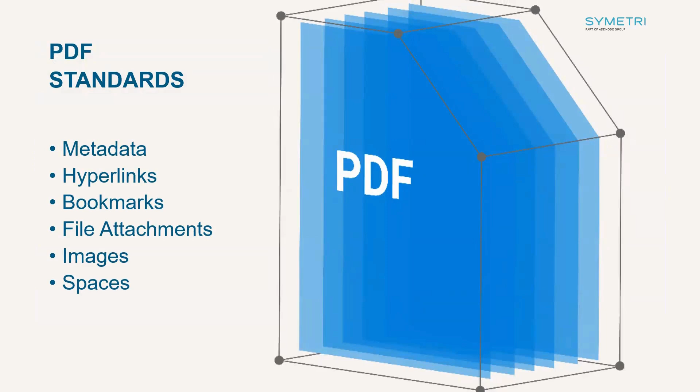Typically, when we talk about PDF files, we often include metadata, hyperlinks, bookmarks, file attachments, images, and spaces without realizing their effect on the PDF file. The benefit of using Bluebeam Revu as your PDF editor is that you can harness and control all of this data.

And I plan to show you some of those tools in today's live demo, including tools for navigating PDF files, tools for marking up PDFs and how to customize the tool chest, the use of profiles and customizing the user interface, the power of the markups list and ways to generate reports, Bluebeam's built-in automation for searching files, comparing documents, and generating interactive forms. And lastly, how to work collaboratively in the cloud with Studio.

So let's jump into our live demonstration.

All right, so I've pulled open Bluebeam and I have a couple files already.

First, we want to show the ease of navigating in a Bluebeam PDF. We can navigate along the bottom of our screen to different pages, and we can also change to a scrolling page mode where we're able to scroll through the document.

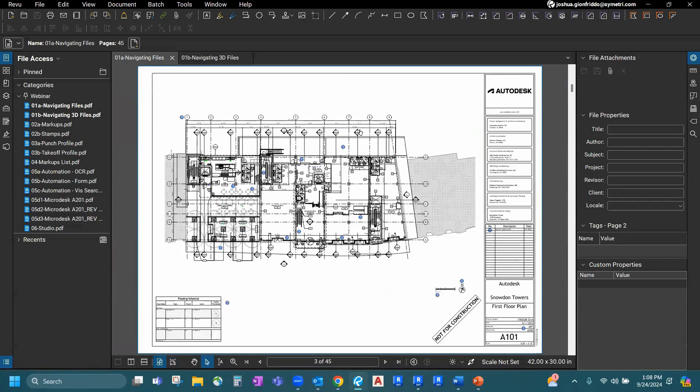One of the automations that shows up when you print from Revit is that your section heads will become hyperlinks. If we look at these section cuts, you'll see that the icon has changed, and if I click that, it'll take me to this page.

I can also use the little icons on the side of each level to take me to the floor plans. So navigating around your PDF file is quite easy. You'll notice on my thumbnails, the pages are currently numbered 1 through 45.

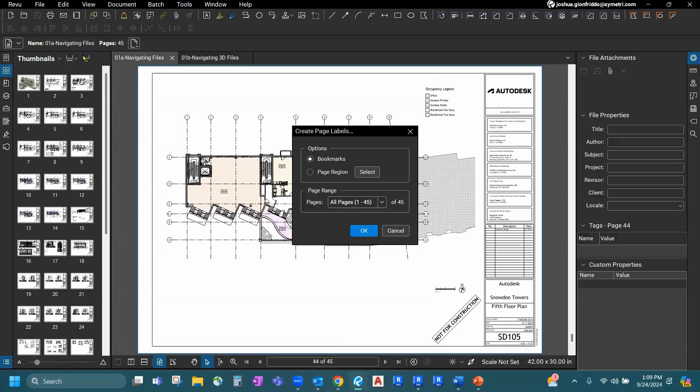If I'd like to have these pages numbered based on the sheet number, it's just a couple clicks to make that happen. We would come under here for page labels, choose a page region and select that region. Find the area of our sheet numbers and highlight that cell, and we can then tell it to perform this operation on all pages.

And if you look here on my thumbnails, all of these are now renumbered to their actual sheet number. If I want to navigate with that, I can do that as well, A502, and it'll take me to that page.

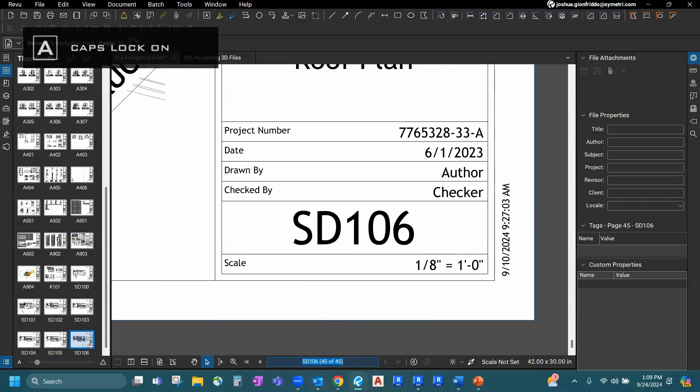This also works well when navigating in 3D files. So we have a 3D PDF file. These are able to be generated from Revit. Once you have Bluebeam installed, you'll have a Bluebeam plugin that will show up inside of Revit, and you can create 3D PDF files right from the software.

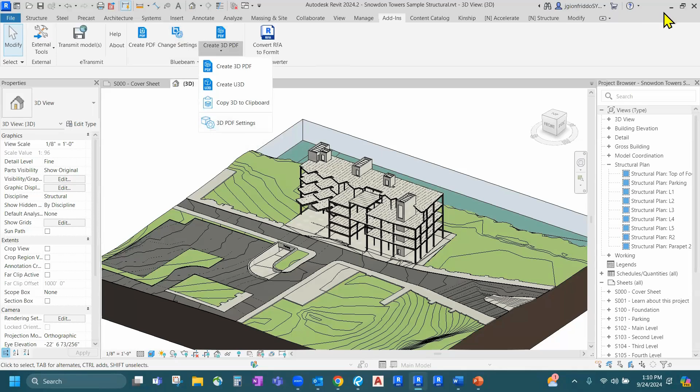Once created and you're inside of Bluebeam, you'll be able to navigate, orbit, as well as control the visibility graphics with different styles. And you can even section box and chop into the model if you'd like to. So we can section box the model.

And I mentioned metadata. If we click on any of the objects located in this 3D PDF, we will see all of the metadata associated with that object that came out of Revit. So all of that smart information is maintained, and we can sort by either the name of the parameter or by the value of the parameters.

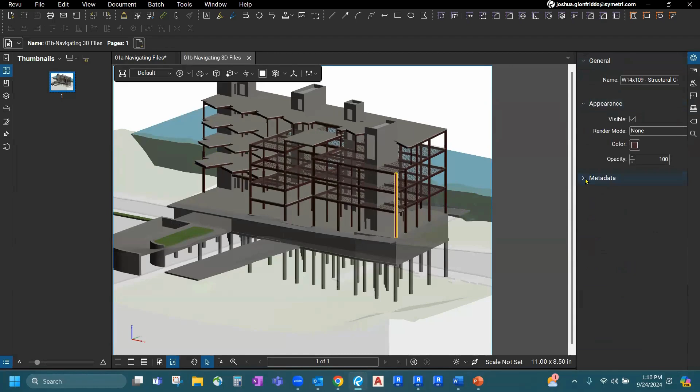So as you can see, navigating documents is a breeze with Bluebeam. Let's take a look at some of our markup tools.

Bluebeam has markup tools available either along the ribbon or in the tool chest, and you can work in either location. We can quickly add text boxes.

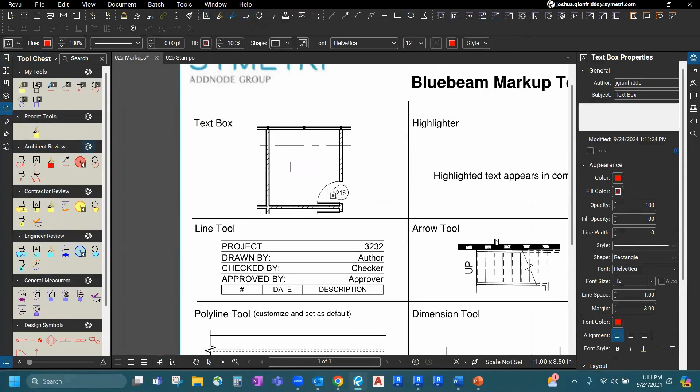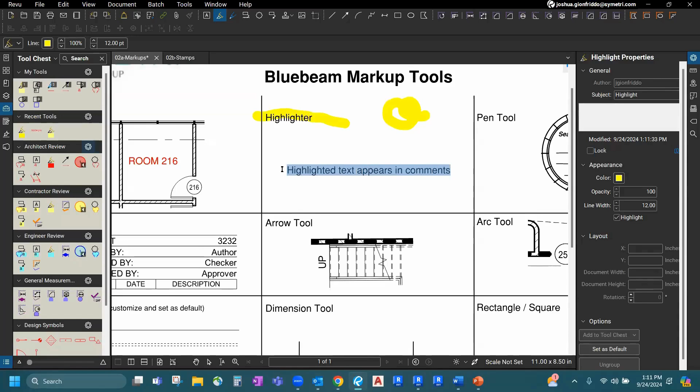And make highlighted markups. Now with the highlighter, if you highlight when it looks like a pen, it'll just be a free-form highlighter. If you go over top of text, it'll change to a text icon, and if you highlight with that, it'll highlight right on the text and bring that text into your markups list.

We have a pen tool, which is great for freehand drawing. So if I wanted to sign this, I can use that.

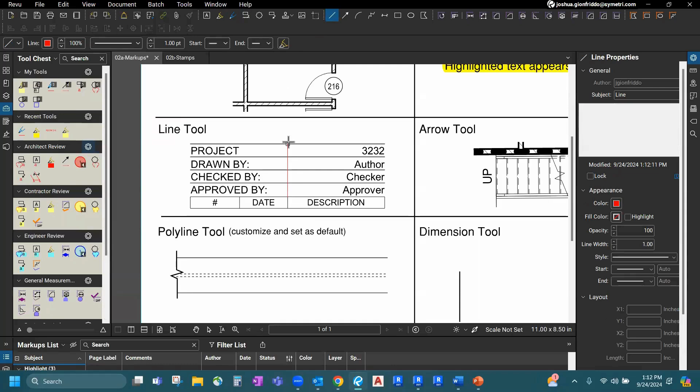And we have a line tool. In this case, I'm going to turn on my snapping to content, which will allow it to snap to the PDF. I can grab my line tool, click once, hold shift, click again, and it'll build a nice straight line.

We can do the same type of thing for the arrow tool. Click once, hold shift, click again, and then we can build an arrow. And lastly, I'll show the arc tool. Again, click here, click there, and quickly can draw arcs.

Now let's talk a little bit about customizing tools. So if we wanted to draw a polyline tool, we can go ahead and grab our polyline command.

We'll click once here... and we'll double click when we're done.

Now to make it look like this side, we'll switch the color of that line over to our black style. And if we wanted to add this as a tool within our tool chest, we could grab that tool from the recent tools and drag it to one of our other tool chests.

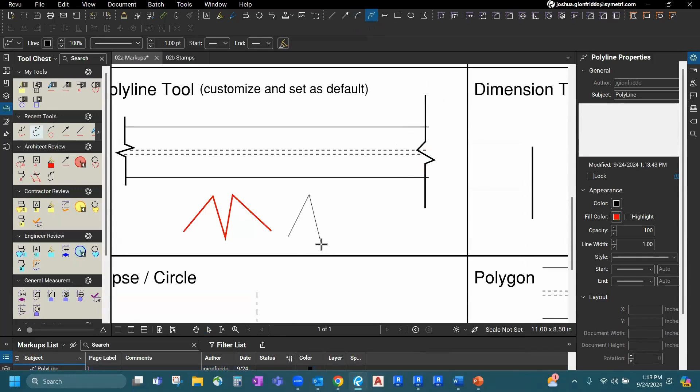Now you'll notice if I draw a polyline again, it's going to be a red line like the original was. So if I want to make the black line my default, I can select one of my polylines, right click on it, and say set as default. Now when I draw the polyline again, it will be the same style as the last one, the black line style.

All right, moving on, we have tools for dimensioning objects. Or we could actually put in a dimension there.

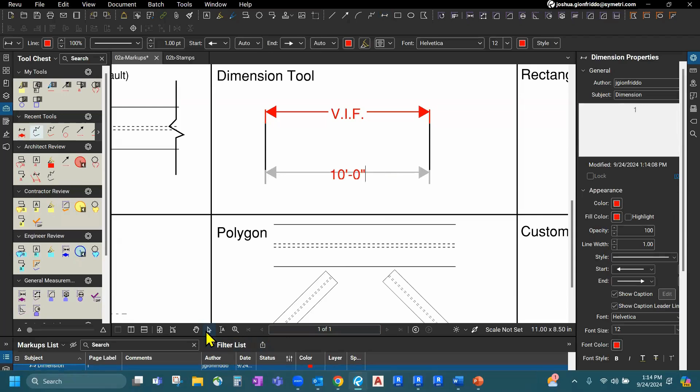And we have the ability to draw rectangles and squares with the same command. The way you switch from a rectangle to a square is you hold your shift key. So I can draw a rectangle over here, or I can hold my shift key and draw a square.

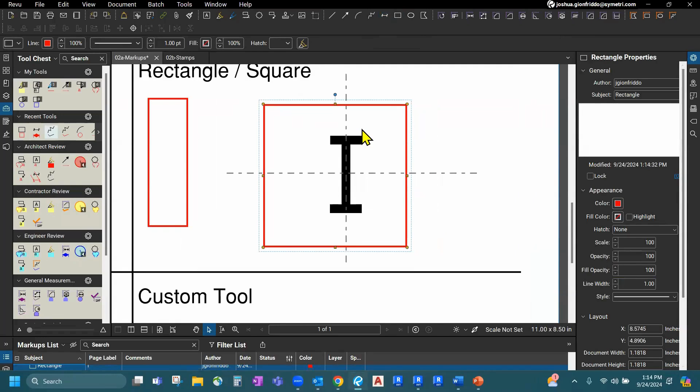And the same for ellipse and circle, you use the same command. Holding shift is how you change between the two. So we can click, hold, and drag and build an ellipse, or I can hold shift and we can draw a perfect circle.

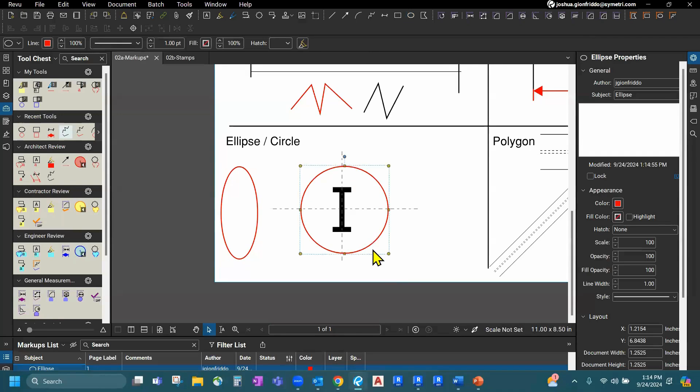The polygon tool is great if you want to build a shape that's not a square or a circle, but you would want to fill it in when you're done. So we can grab the polygon tool and we can click here, click here, click here. Hold shift whenever you want a straight line. And when you're at the last point, you'll double click, and that will create the shape.

And now if we want to, we could fill the shape in. Maybe we want to have it filled in orange and be the highlighter red, which will send it to the back.

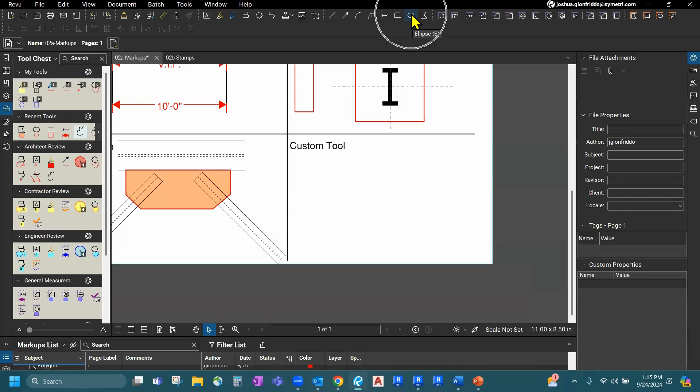Last markup tool I'll show is how you can build custom tools. We can take multiple tools and build them into a custom tool. So I'll start with my ellipse tool, holding shift so that it makes a circle. I'll next grab my text box tool and place that in here, and type in the word grid.

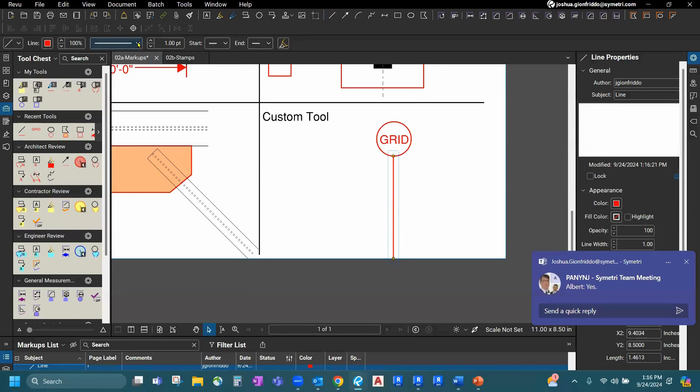I'll now grab my line command and draw a line from the grid bubble down. If I'd like this to look like a grid line, I can change its style over to a center line.

And if I want everything to be in a different color scheme, I can select them and change the color. Maybe we want the grid bubble to be gray, so we'll switch everything into a gray color.

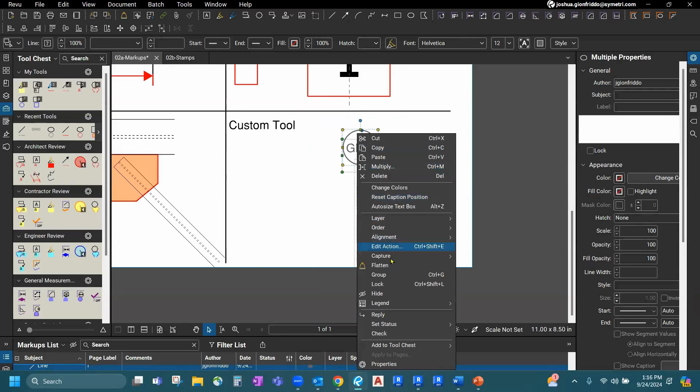And now to make this a tool that I can use, we're going to select it, right click on it, and group these objects. And now in my recent tools, I have a grid command or a grid tool that I can use.

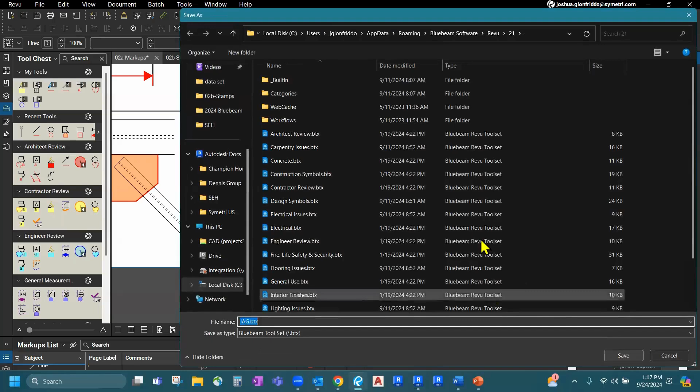Now I want to go ahead and create a custom tool set that I'll be able to place this in. So I'm going to go to my tool chest area, go to manage tool sets, and create a new tool set. I'll just use my initials for this, and we'll okay to that.

Actually, let me go back in there briefly. I'm going to move this up in the list so you'll see it easier. It'll pop up here on my list. We'll say okay to that.

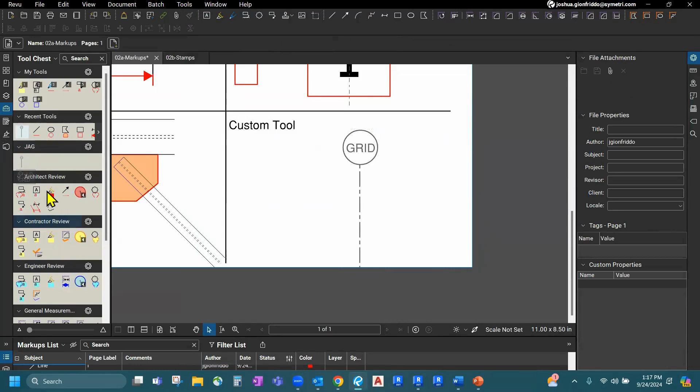And then if I want to save this permanently, I can click, hold, and drag that tool down into my JAG tools. And now I have a new grid tool that I can use anytime on any drawing that I need it on.

Speaking of other custom tools, let's look at our stamps commands. So we do have stamp commands, and if we want some of our out-of-the-box stamps, we have ones like this one for approved. If you want to place an approved stamp, you can grab that command and click, and it'll place the stamp. The other way you can place a stamp is to draw the size of the stamp.

So I can go to the same approved stamp, and I can do click, hold, and drag, and I can change the size of the stamp. I can make it really small, or I can make it really large if I wanted to.

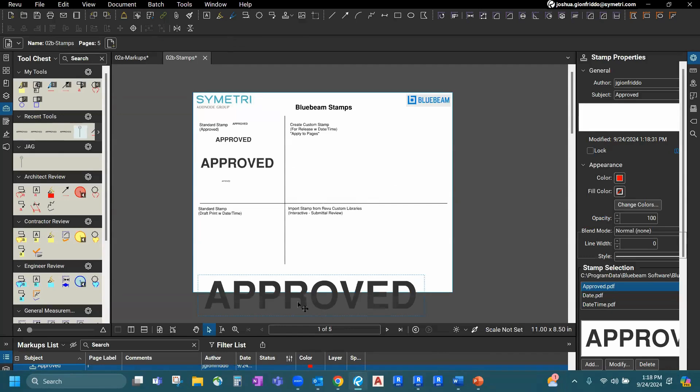I can also create stamps, or use stamps that have interactive text in them. So you'll see that we can go to a draft print stamp, and we can grab the draft print and place that stamp here. This is interactive where it knows today's date and today's time.

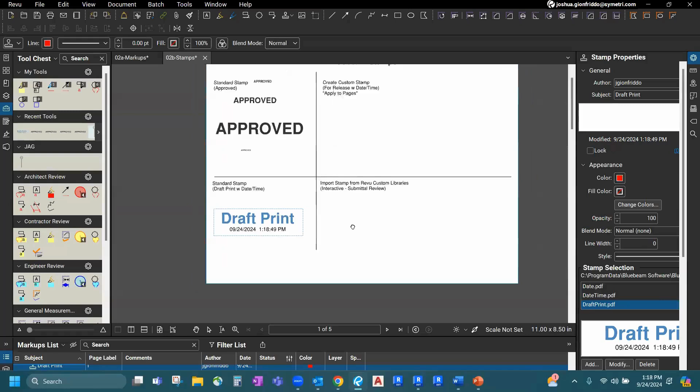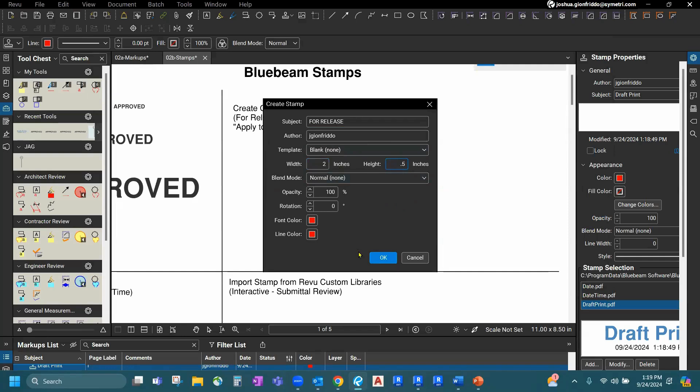So I'd like to show you how you can quickly build a stamp similar to that. If you go to your stamps command, you'll go to create stamp. I'll name the stamp here for release. I'll make this stamp 2 inches by a half inch, and we'll accept the rest of the defaults.

Now I'm on a stamp editing palette, and I can use any of my markup tools to build my stamp. So I'm going to start with my text box, and we'll say for release.

Now, in order to get the dynamic text for the date and the time, if you start typing another text box, you'll see the dynamic box opens, and you can choose some of the dynamic text. So in this case, I'm going to say date.

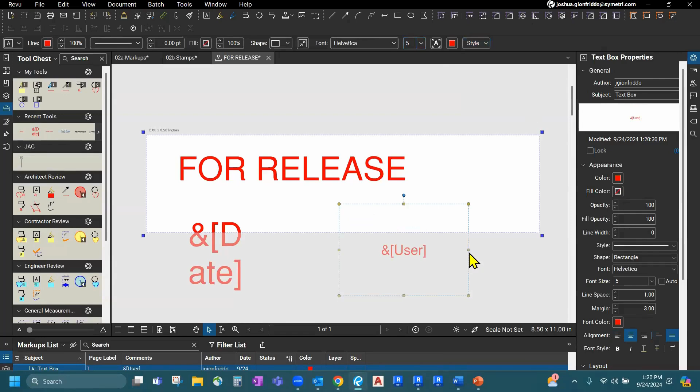And I'll make another text box, and I'll make this one my name, so I'll say user. Now we'll want to size these up, so I'm going to shrink this font down a little bit. And we'll want to center everything, so we'll get that centered. Now I can place that here on the palette, and we'll do the same for this one.

Shrink this font down. And for this one, we'll leave the font there, but we'll center it.

All right, and then we'll save that and go back to our stamps page, and that'll be available in our stamps list now. Here's our new for release stamp that we can now place as needed.

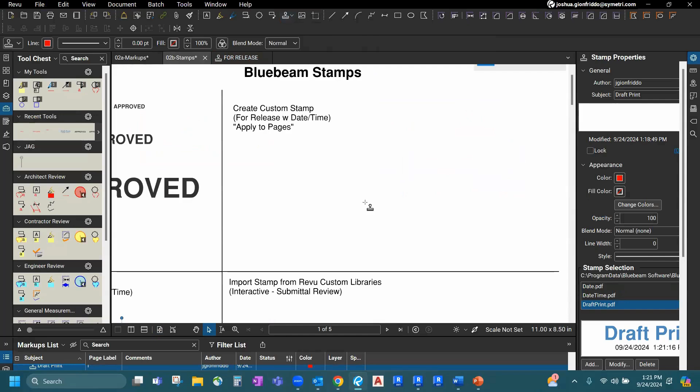Now, another way to obtain custom stamps is from Bluebeam directly. If you go on the web and Google the Revu custom libraries, that's the easiest way to find it. It'll take you to this Bluebeam support page.

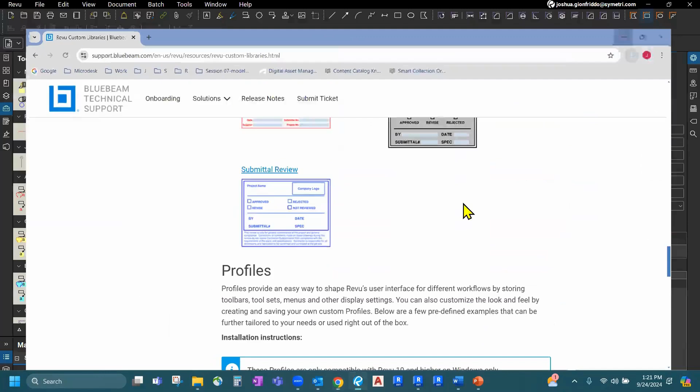On there, they have some custom stamps that you can download. By clicking on them, it'll download it to your machine. It's a zipped file, so you'll need to unzip it. Once unzipped, you'll be able to import that file or that stamp and use it as a custom stamp.

So we would go under the stamps and use the import stamp option. In this case, I believe it's on my desktop. And here we go, submittal review, and we'll use this one. So now that should be imported, and here's that stamp.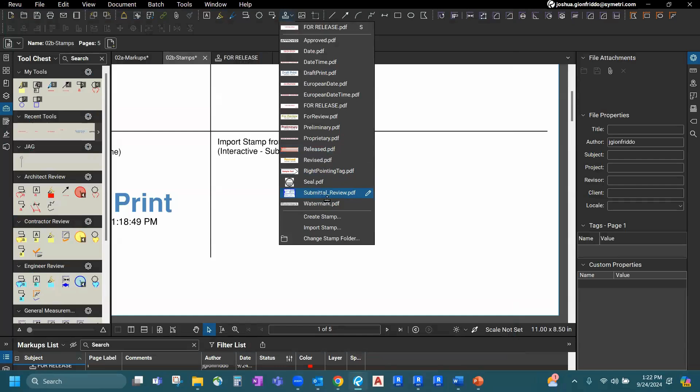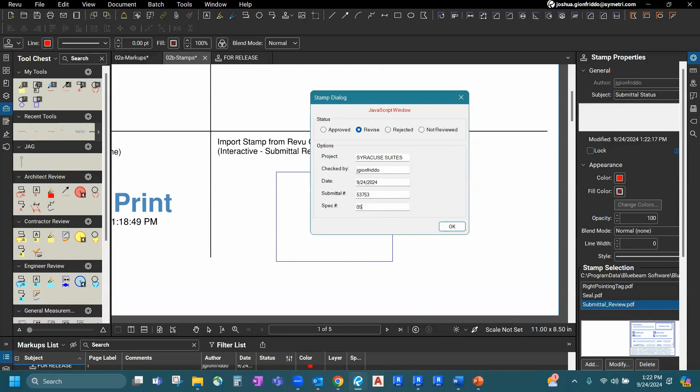You'll see when you place this one, it's actually an interactive stamp where it prompts you with a fill in the blank type message. So we'll say it's revised, we'll put the project information, submittal number, and spec number. And you'll see that that stamp has now filled itself in with that information.

All right, let's move on to the profiles.

So when working in Bluebeam, from time to time, the workflow you're working on may require a different look to your screen in order to facilitate the workflow you're about to start. So if we want to work on punch lists or field issues, we have a profile for that. If we want to work on taking off measurements, we have a profile for that.

So let me try to reopen these. I'm not sure why they're not coming up. There we go. All right.

To switch your profile in Bluebeam, you go to the Revu button, Profiles, and here are the built-in profiles. I won't be showing it in the demo, but you can also create your own custom profile if you want and save that. But for us, let's go ahead and for the punch list, switch to our field issues profile.

And with that, you'll notice the tool chest has a lot of new tools in it. These will be the punch list items that I use.

The rooms that you see in purple have been created. In Bluebeam, we call them spaces; inside of Revit, we call them rooms. They are the same thing. If you want to see what they are, we have our spaces panel, and this will show you the different spaces that are available. This helps when you get into the markups list to organize where these issues were happening.

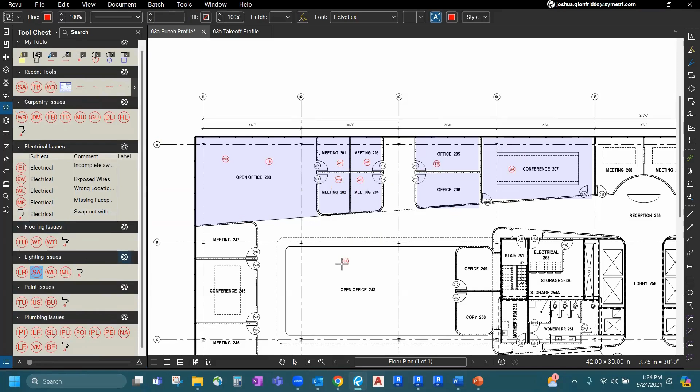And as you do that, it's creating a report at the bottom in your markups list. You can see it's even associating each one of these issues with the space that their issue is contained in.

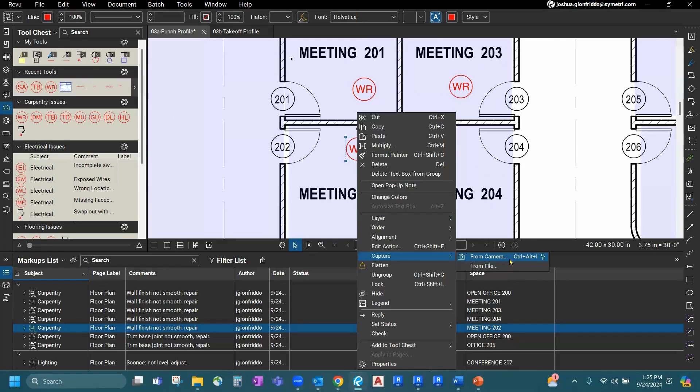One of the other things you can do is if there's an issue you would like to document more, you can select your punch mark, right click on it, and choose to capture. This is capturing an image. You can choose to capture that image from your camera, so you can imagine if you're with an iPad live in the field, you can just snap the image there. Or if it's already uploaded on your computer, like in my case, you can say from file, and then you can go to any image you would like to load, and add that image into this markup.

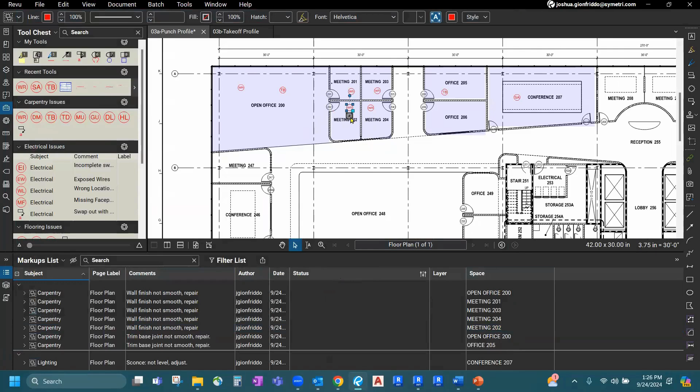So maybe we had a wall issue, we can add this issue, and it doesn't put the large image on the PDF for you. It puts this small camera icon on the PDF, so you're not blocking the PDF. If you run the PDF report, the image will show. If you want to see the image, you click the little camera icon and the image pops up.

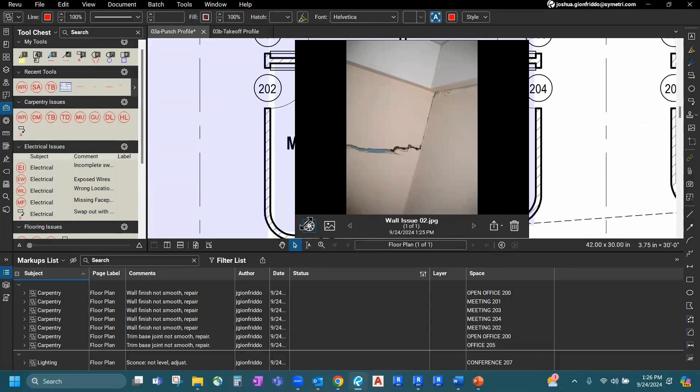You can also have more than one image. If you had more than one image, these arrows would be usable. In my case, they're not because I only have one image right now. And then from this window, you can add more images from files or add more images from camera, right from this dialog. So that's capturing an image as part of your markup.

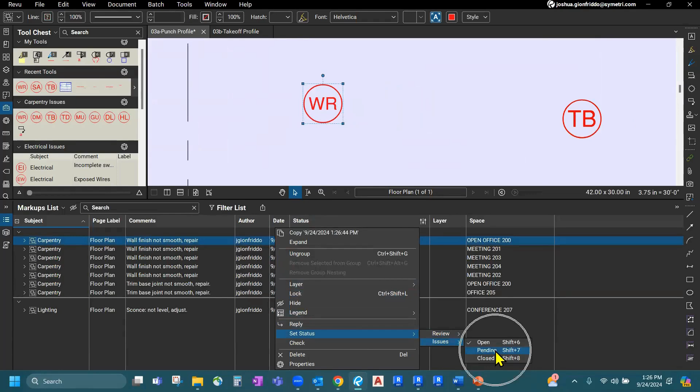Then the other thing you would do with the markups list when you're working with Punch is to use the statuses. Once this is starting to be worked on, you can right click on this, set the status under issues. Maybe this is an open issue, and you'll notice that it doesn't really affect it. But if I right click and set the status and say that it's pending, now you'll see it turns orange automatically.

And if I actually complete the work, I can set the status then as closed, and you'll see it turns green as showing that it's all set. And each of those has been tracked through my markups list.

Another profile that we use from time to time is our measurements profile or our takeoff profile. So if you want to take live measurements of a PDF, we can do that. One of the profiles that we have available to use that helps facilitate that is the one here called quantity takeoff. So we can switch over to that. You'll see my icons change. I have more measurement tools now.

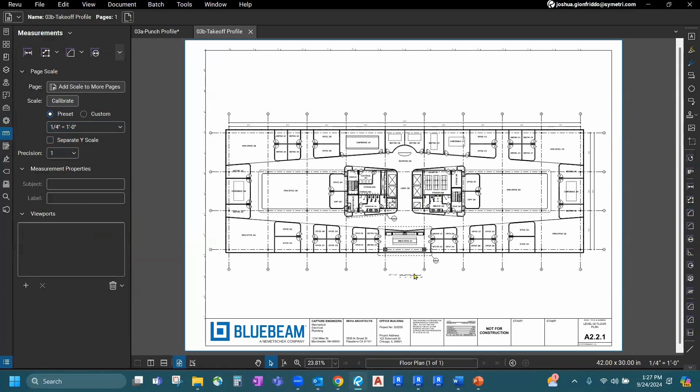And step one, whenever doing measurements, is you want to check under the measurement panel that your scale is correct. So right now, the preset scale is 1/4 inch per foot. And looking at my drawing, it looks like my drawing is set up as 1/8 inch per foot. So I'm going to go into my preset dropdown, choose my 1/8 inch per foot scale. And now I'm going to be able to use my measurement tools.

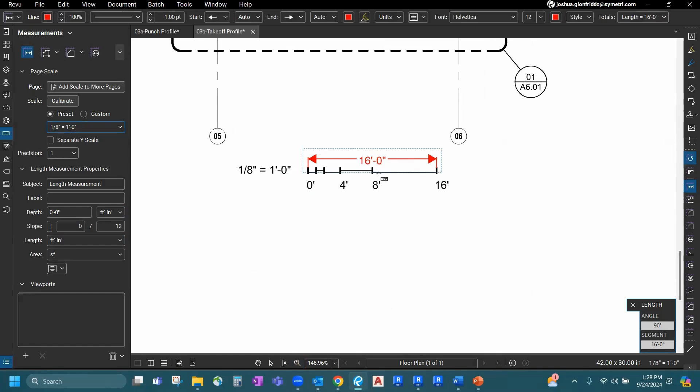So just as a proof of concept, I'll take my length tool. I'll measure from this point to this point, and I'm getting that same 16 feet. If I had left the scale at 1/4 inch as we started, you'll see this shows up as 8 feet, which is not correct. So that's why you want to make sure your scale is accurate, because this is measuring based on scale.

Now that we know that the measurements are correct, we can go ahead and zoom into an area where maybe there is a missing measurement, and we can find out what's the width of this lobby here. Or maybe we're checking for ADA compliance and we want to make sure that this bathroom stall is the 5 feet it needs to be.

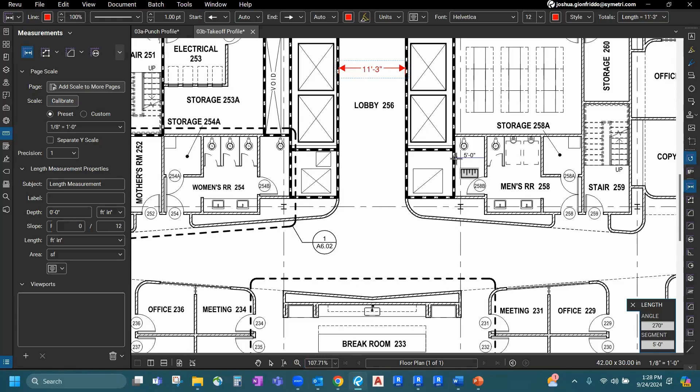So we have length measurements, we have area measurements. If you'd like to know the area of a room, I'll start off with one that's sort of rectangular, and then I can move over to one that isn't. So here's one that's sort of rectangular, and we can take the area of this room.

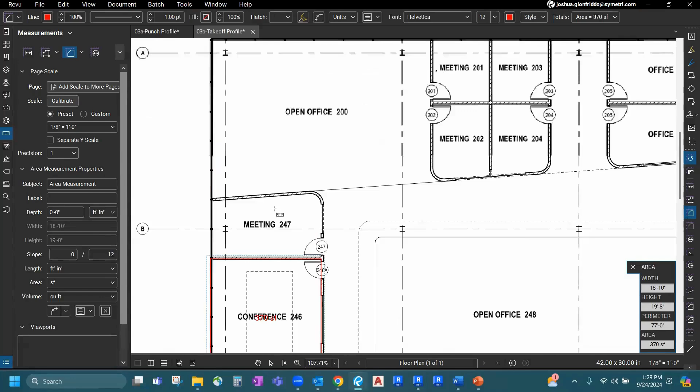If I need to move this, I can hover, shift, click, drag. Hover, shift, click, drag. There we go. I can move that little label if I need to, but now we found the area of that room.

If you get into a room that isn't a perfect rectangle, not a problem. What you do instead of click and drag is you click multiple times. So I'm clicking each of these vertices. I'm going to double click here. And then for this corner, I'm going to escape. I'm going to right click on that corner and say convert to an arc. And now that'll be a little more of a curve. I can adjust that curve as needed. And now I get the square footage of this irregularly shaped room.

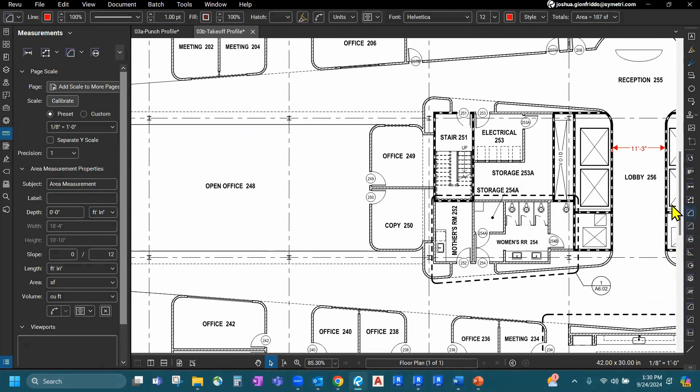And we have measurement tools for taking, like I said, lengths, areas. You can do angles, volumes, perimeters. Let me show you maybe a perimeter tool. So if I wanted to know the outside shape of this, I can click each one of these spots and then double click here. And that gives me the perimeter 157.2. Maybe I needed to know how much baseboard to order for this open office. Now I know how much.

Now, when we get into irregularly shaped objects, like maybe this weird shaped column chase, we have another option that we can use, which is called our dynamic fill or our dynamic measurements. So I'm going to do my dynamic fill using first my dynamic icon down here.

That'll bring up my dynamic dialog box. To place the fill, I'll use the fill bucket. I'll click, hold, and I'll just wait as it fills in.

And now that the shape is defined, I have the choice here of what I want to create. Do I want to build a space out of this? Do I want to build a polygon? Do I want the area, the perimeter plus all the sides, just the total perimeter, or the volume? I'm going to say, give me the area and the perimeter. And with those, I click apply.

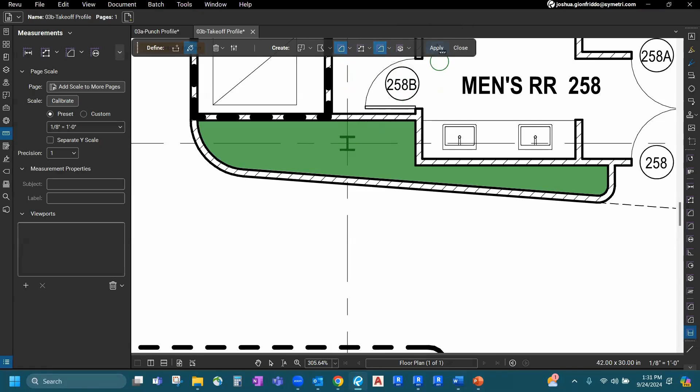And now in this irregular shape, it's calculated the square footage area and the total length perimeter without me having to define these weird boundaries. So dynamic fill is a great way to do your measurements if you need to do them in irregular places.

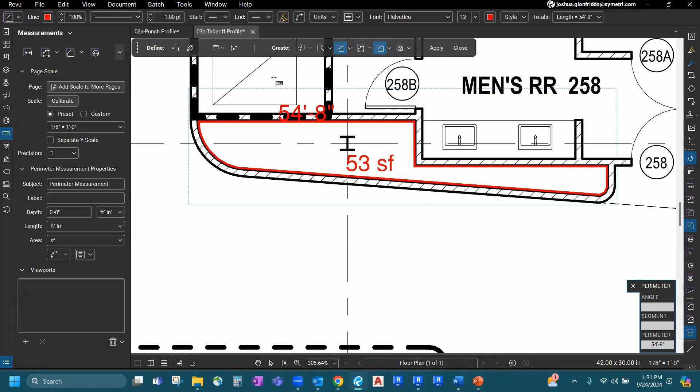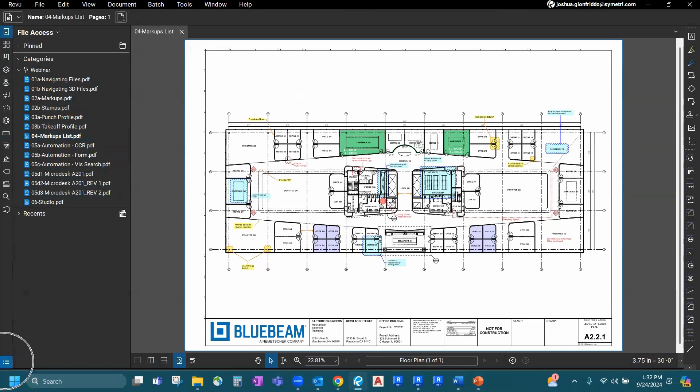All right, all of these things we've been showing have been filling into the markups list. And the markups list is the piece where you can then generate a report and capture all of that data. The report can be done in four different ways. The markups list is obtained by either clicking the little button here, or by finding the bar at the bottom of your screen and click, hold, and drag to move it up.

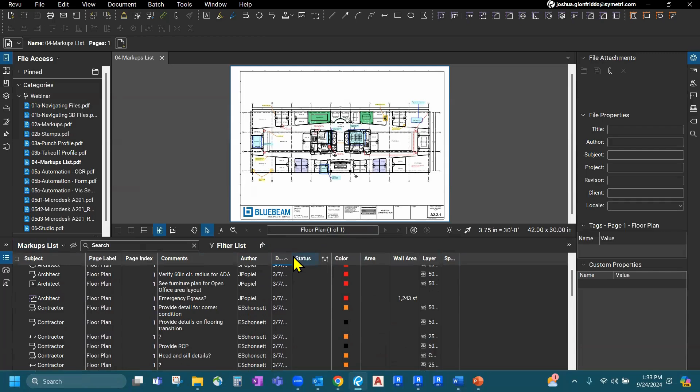And I can do it by date. So we can slide this over and I can sort by date. And if you click it again, it goes ascending and descending.

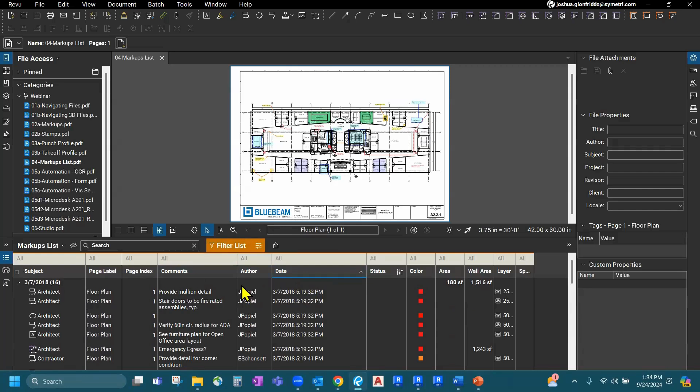We can also then sort the list, or they call it filtering the list. So if you turn on filtering, then you can decide what you want to filter out. Let's say we only want to see one author. I can pick under all, and I can pick the author I want to see, maybe J. Popiel. And now that's the only set of markups that are in the list.

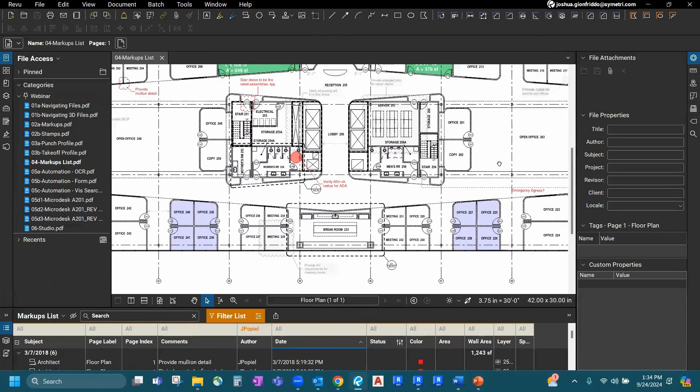And if you notice on the plan, some of my markups have grayed out. So any of the ones that were filtered out are now gray to tell me that they're no longer live and active because of the filter. If I want them back, I can unfilter and everything comes back. If I refilter, then again, those ones are gray.

If I want additional items, I can click that and I can add more pieces to my filter. So now I've done two authors, not just one, and we can see there's the Popiel and the E. Schonsett.

And then I started mentioning that we can build reports. So the reports are generated from this summary button.

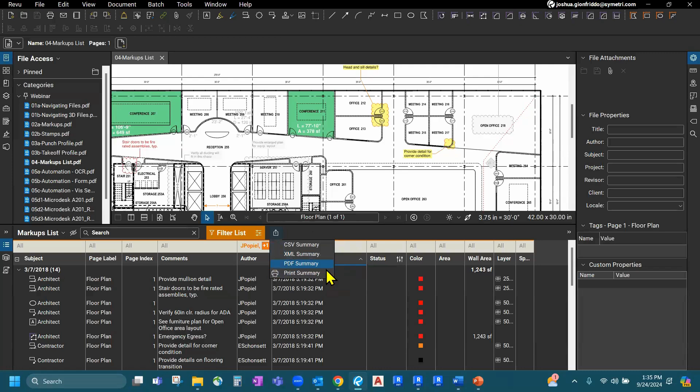I mentioned there are two, but there's really four, or probably closer to three since PDF and print are basically the same. You can export to CSV if you'd like to use this data in Excel, or to XML if you'd like to use it on the web. If you just want a printed report, you can print a PDF or print directly to your printer. So I'm going to do a PDF summary.

Under columns, this is where you decide what information or columns you want in the report. You can click this button to include all the data. Under filtering and sorting, you can decide what to include or exclude. In this case, it's only filtering by certain authors since we've already filtered down here, but I can undo that and say give me all. Then for sorting, I'll sort by the subject, which relates to some of these headers over here.

Then how do you want to output the report? This is where it decides where to save it, what name to use, and how it will look. We'll say we want a large thumbnail, and I like to bump this number up as well. This is how much area around the thumbnail you get to see, so the bigger the number, the more you see.

All of these settings can be saved and reloaded next time. If you have a certain setting you use for your company all the time, save it and then reload it as needed. So we'll go ahead and create the report, and that's processing now.

And here is the 21-page report of all of our markups. It also shows the image of where it is and provides all of the details for that markup.

All right, let's move on to section 5, Bluebeam automation. We'll cover OCR, forms, and visual searches, and then I'll do part D after.

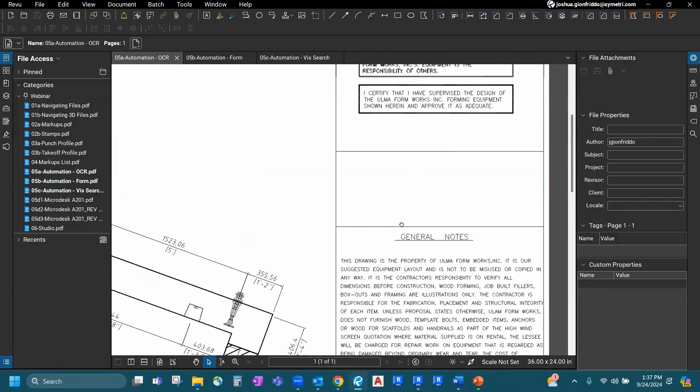Bluebeam has some powerful automation built in, and we're going to go through a few of these automation workflows right now. The first one is what we call OCR, which stands for optical character recognition. You'll notice that this file is a scanned file, or at minimum came out of AutoCAD. It's definitely not a Revit looking file.

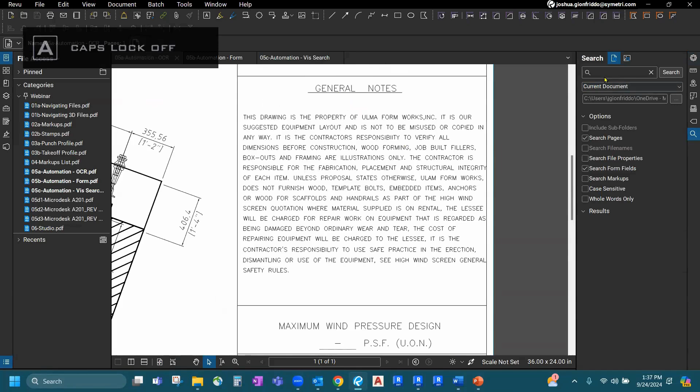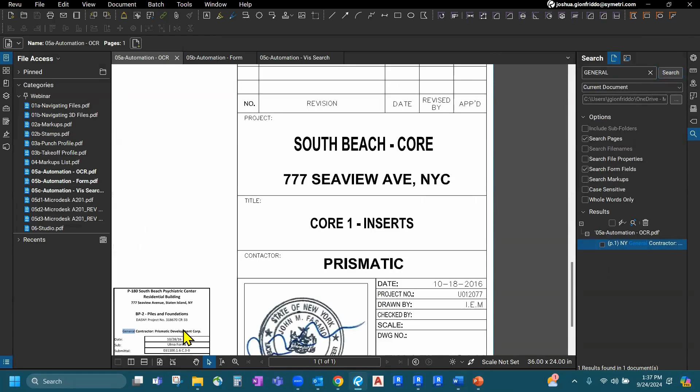If I try to search right now in this file for a word we can see up here, there's the word 'general.' I'll search for that, either caps locked or not, but let's do it caps locked. If I go to search, it's finding one instance. Clicking on that, it's finding it down here on this stamp, but not finding it up here.

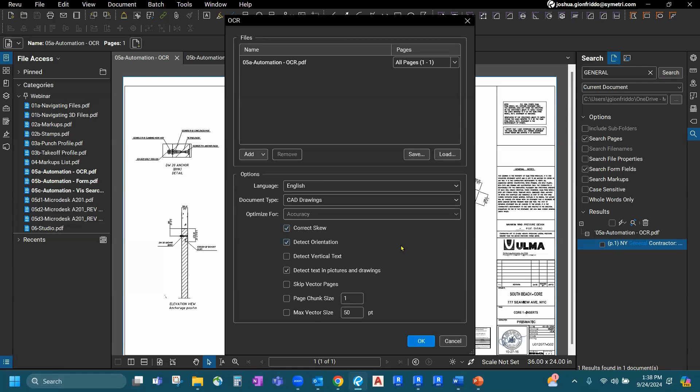So what you can do if you have a scanned document or maybe an older CAD document is go under Document and run what we call OCR, or optical character recognition. This allows Bluebeam to scan your documents and turn the scanned or non-readable text into actual editable, searchable text.

So we'll say okay, it'll run through and do its conversion. You can do these on large file sets, and you can even do this on an entire folder if you want to.

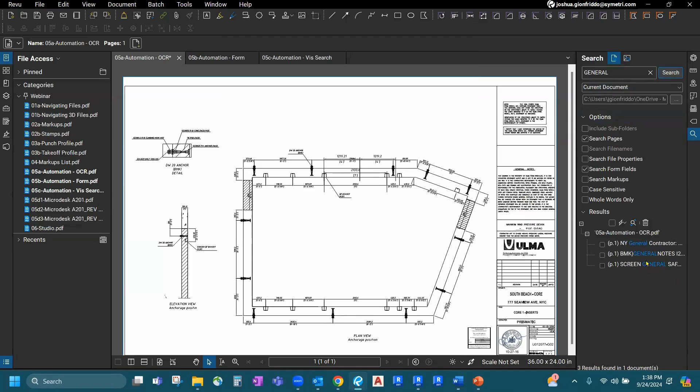With that done, if I search for 'general' again, you'll see that I have more results. Going to these, it's finding the ones up in this area. If I go to that one, it's a little off on where it highlights it, but it found where it is. So OCR is an automated optical character recognition feature within Bluebeam.

Another automation we have is form creation. If you've ever had one of those forms where you can just click in the cells and tab through them, Bluebeam can generate those types of forms. Under Tools and under Forms, we can go to automatically create the forms, and it'll run through and create them for us.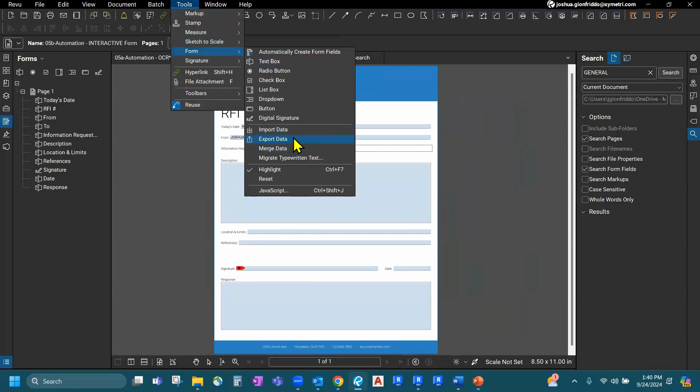There are some other powers that come with that. When you're in forms, you can take the data and export it out. So if you wanted to have a bunch of your employees fill out the form and give it to you, you can then export all that data, and maybe it's in Excel so you can run graphs and tables and whatnot. So there are some additional powers to this, but the automation you see is very quick and very easy.

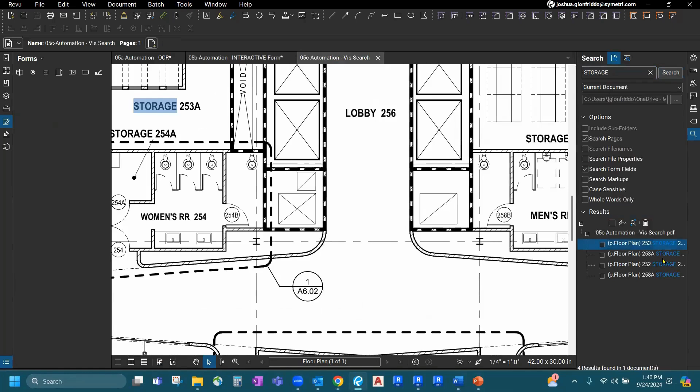Another piece of automation I want to show has to do with searching, but not just searching words, which of course, like we did with general, we can do. I can type the word storage and search that, and it'll find all the locations for storage. But another great thing that Bluebeam offers is the ability to search visually for objects within the file.

Let's say I'm doing estimating and I want to count how many sinks I have in my building. I can go to this tool, visual search. The way you define the search term is with this get rectangle. So I'll use get rectangle, click, hold, and drag a rectangle around my sink. I'll make sure my search for multiple rotations is on, because I saw already that some are twisted at a different angle. Then I'll run the search.

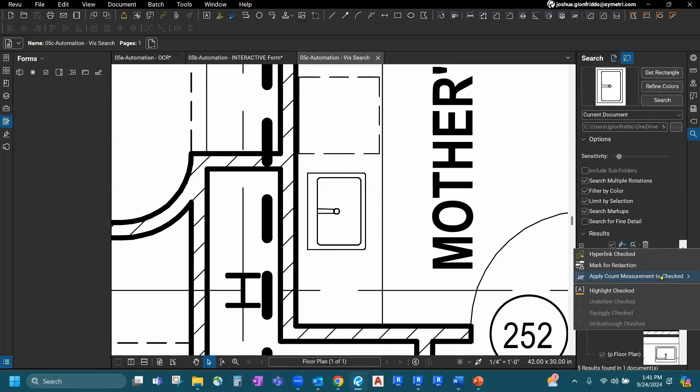This will go through and find the 5 sinks that I have in the document. But more importantly, I can now count these. So I can check this button on, go to the lightning bolt, and say apply a count for the checked. This is going on to my other screen, sorry, I'm going to shrink this for a second. There it is, so I'll put the check mark.

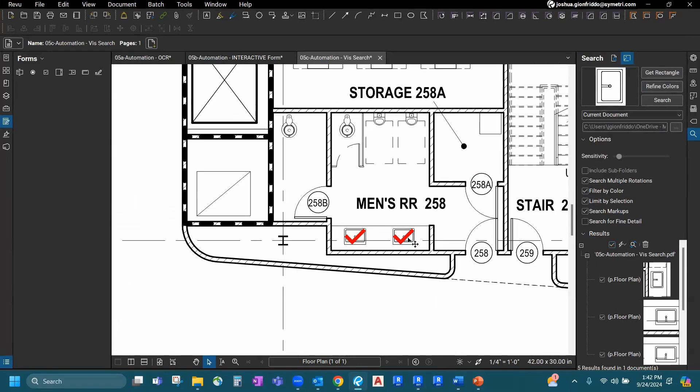Now you'll see a check mark on each of my sinks. So we have one there, one there, one there, one there, and one there. If we look inside, we see that we have 5 sinks counted. And if I wanted to really mark this as sinks, I can right click on this and put a reply and type in the word sinks. Now we see that this count measurement is for the sinks.

All right, so the last piece of automation I'll show is how we can compare documents. Let me close out of these and open up some of my comparing document files. When we compare documents, we have two different ways we can do that in Bluebeam. Under document, we have compare documents, and we also have overlay pages. I'll show you what both of these do. I'll start with compare documents, and this will take document A and document B and compare them and put clouds around the differences.

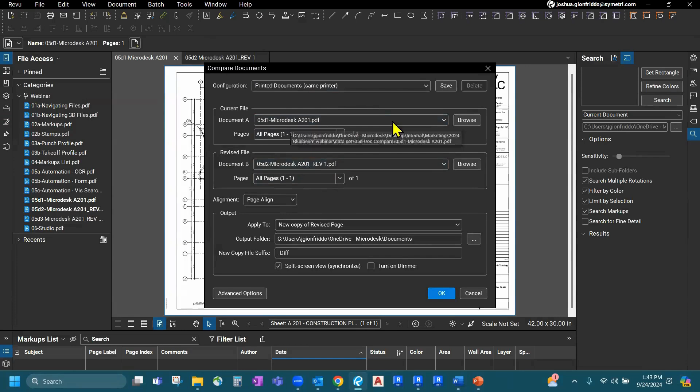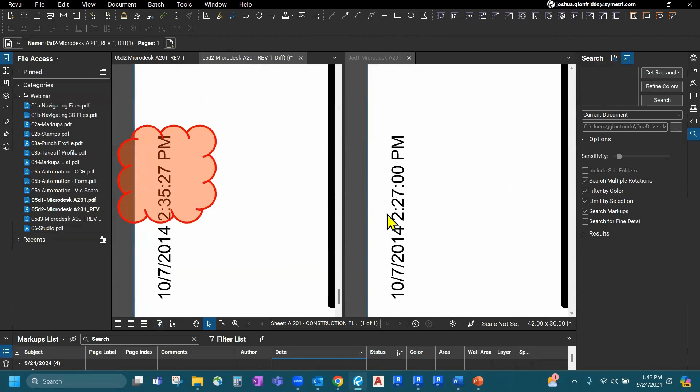It opens up this split screen like you see, where I can zoom in on one and it zooms in on the other one, and we can see the differences there. We added a revision and updated this area by adding some extra rooms. It's so detailed it can pick up that these two documents were printed a few minutes apart. So all the differences between these documents get highlighted, and it's created a third document called difference. I can save this, email this to colleagues and whatnot. So that's comparing documents type 1.

Comparing documents type 2, let me close out of these and open up the Rev 2 document, is what we call overlay pages. If you've ever worked with a light table that you can shine through a document, that's sort of what this does in a digital way. So we'll say overlay pages, and I'll have to add in that other page, which will be my Rev 2.

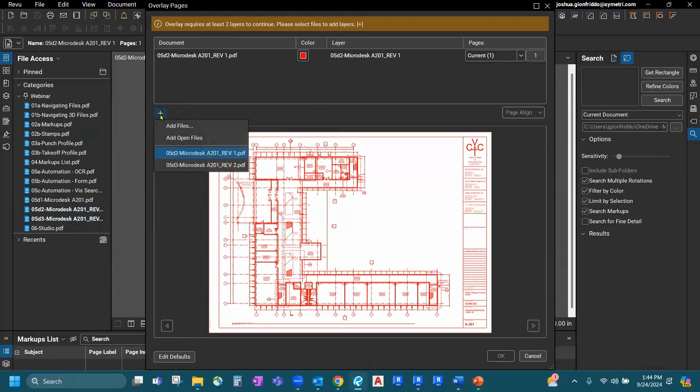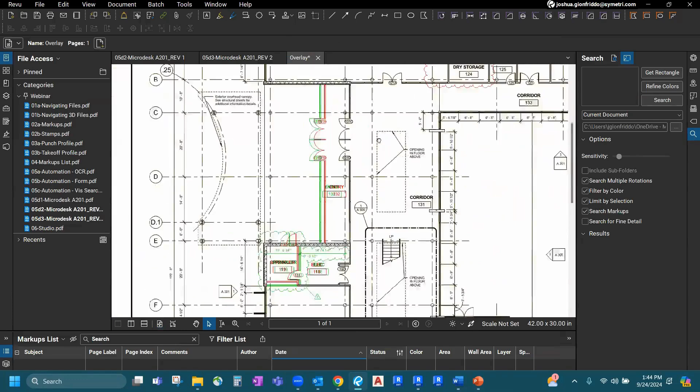Now I have Rev 1 will be anything in red, Rev 2 will be anything in green. Anywhere where they correspond, we'll see the standard black PDF font. So we'll say okay, and again, it's made a new document. I can save this and email this as needed. Anything on Rev 2 is green, anything from Rev 1 only is red, and anywhere the revs overlap, you'll see the old and the new kind of blended together. So this is the overlay pages for comparing documents.

All right, the last thing I want to show in my technical demonstration is our cloud tools, mainly the Studio tool. So if you want to work remotely in the cloud, you have Studio. I'm going to focus on Studio Sessions today.

We also have a Studio Projects tool, but let's look at Studio Sessions. This is the live real-time collaboration tool built within Bluebeam. To start a new session, you hit the plus sign here and then say new session, and you can name it. If you had files that you wanted to add, you can add those now, which I do. So I'll add files. We'll go to our data set and add in our Studio files.

Then, as the creator of this session, you have options to set for the permissions for other users. If I want other users to add documents, I can set that up. If I want people to only be able to join with an email address—meaning I have to invite them—I would leave this checked on. If I want them to join with any valid 9-digit session code, I can uncheck this and then anyone can join with that code. I'm going to leave it checked on.

I never have a session expire in the real world, but since I'm doing this just for class, I'm going to have it expire on Friday. So that's how you create the session.

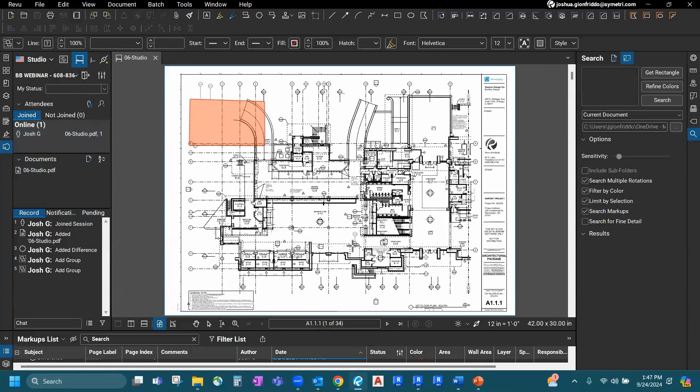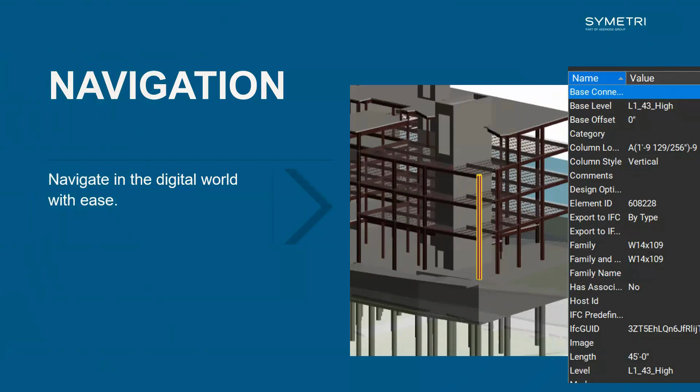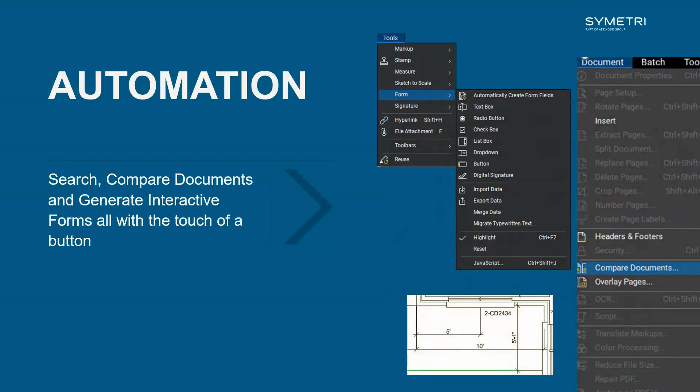So I hoped everyone enjoyed seeing Revu in action. By the volume of tools that I showed in that technical demo, I hope that Revu's ease of use is apparent. To recap a little of what we saw: tools for navigating 2D and 3D PDF files; the extensive markup tools and how to save custom tools; how to use custom profiles, whether for field issues or measurements, and the power of changing the user interface; the power of the markups list and how you can export, sort, and filter data; the automation within Bluebeam for things like searching and generating automatic forms; and lastly, the cloud tools where you can collaborate in real time with your project partners.

So at Symetri, we know in pursuit of sustainable design, the pressure for digital transformation has been amplified, and you need to respond with flexibility. Since working remotely is not unique in today's world, keeping control over self-service options is crucial. You also need data-driven business practices that are secure, especially with increasing information security standards. And with regards to reducing costs, there's a scarcity of skilled labor, changing demographics, and changing project logistics. As a result, technology and solution providers need to be more innovative to overcome these challenges and provide a competitive advantage to their customers.

Bluebeam is doing this. How? By offering 3 different levels to purchase Revu at.

For a high-level overview of the plans, starting with Revu Basics, you'll have the essential tools for marking up and managing your AECO office and project documents. With Revu Core, you'll have more tools for managing and collaborating on small and mid-sized projects. Core includes all the features of Revu Basics, plus real-time collaboration via Studio directly within Revu. And Revu Complete is the most comprehensive plan. It has everything you need to manage and optimize complex AECO projects at scale. You will have all of the Revu Basics and Core features, plus advanced Bluebeam functionality.

Now, before we close, I'd like to share some feedback we've received from clients EllisDon and Chandos Construction, highlighting the results of their recent digital transformations. Jane from EllisDon said, knowledge, awareness, and education are a big part of the whole exercise here. To build that library of information about opportunities and ways to reach net zero, their team is focused on 3 key areas: business operations, material procurement, and the built environment.